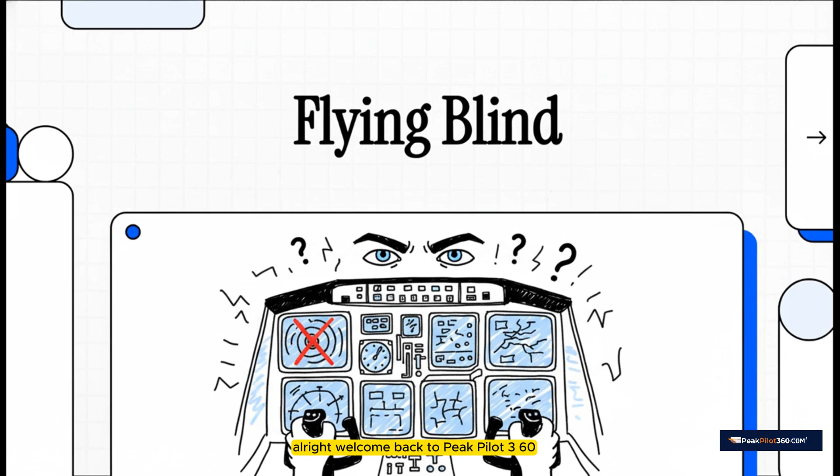Imagine you're in the interview. The captain across the table leans forward and asks, 'You're at flight level 350 and you get an unreliable airspeed warning on the ECAM. What are your immediate memory items?' It's a tough question, and your answer could make or break the interview. Stick with me, and by the end of this explainer, you'll know exactly how to nail it.

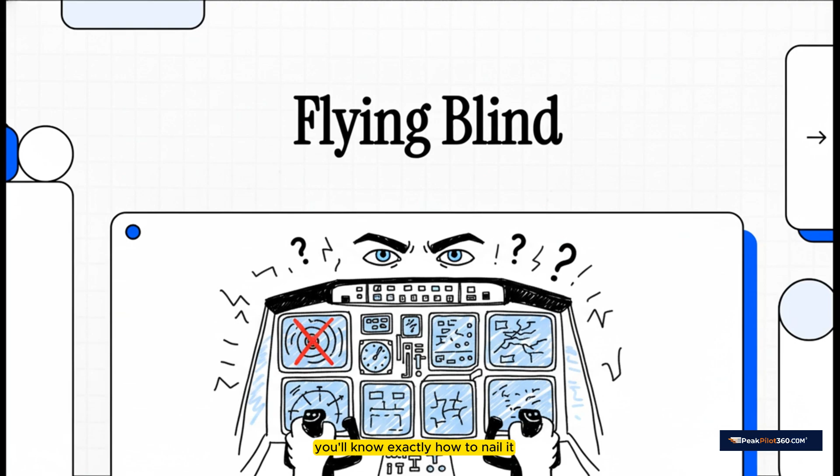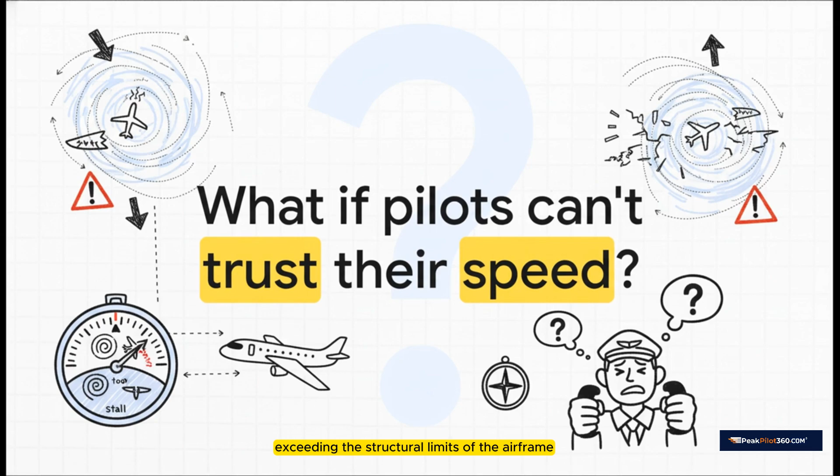So let's break this down. This is the heart of the problem, isn't it? If you fly too slow, you're looking at a stall, you lose lift. If you fly too fast, you risk exceeding the structural limits of the airframe. When that speed tape is telling you lies, you're essentially flying blind between two invisible and very real dangers.

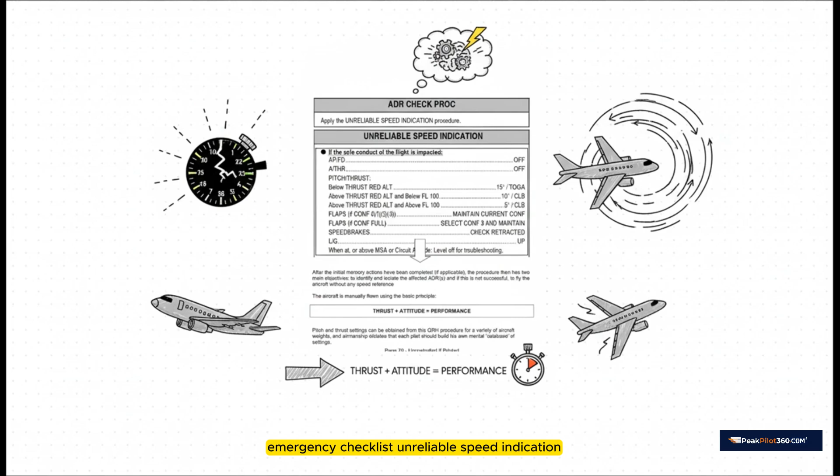So what's the procedure? What do you do? Well, this isn't some made-up scenario for a movie. What you're looking at here is a real-deal emergency checklist. Unreliable speed indication is what we call a memory item. You have to know these actions cold, by heart, because when this happens for real, there is absolutely no time to be fumbling around for the QRH.

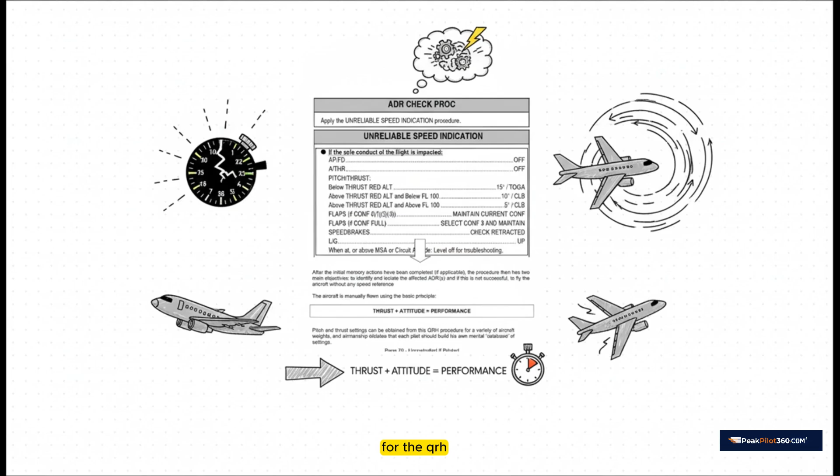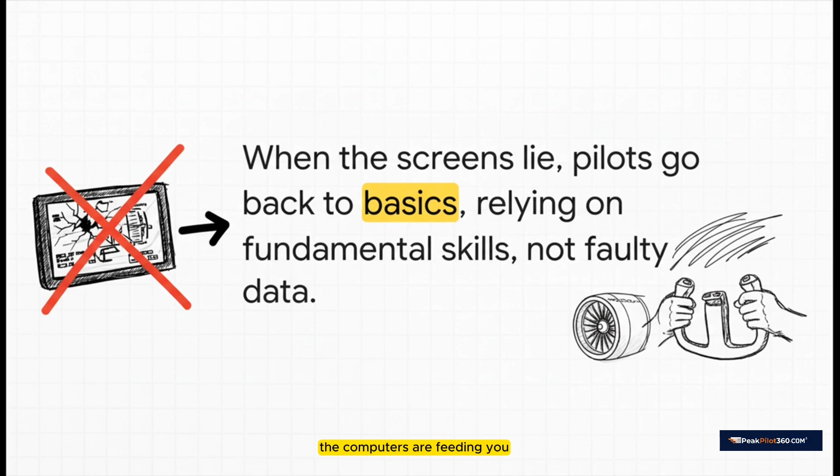The answer isn't some other piece of fancy tech. In fact, it's the opposite. The procedure is to strip everything away. You've got to ignore the bad data the computers are feeding you and get back to the absolute fundamentals, the raw relationship between you, your engines, and the air.

And this, right here, is the core of it all. It's a simple, beautiful formula every single pilot lives by. Thrust is the power you command from the engines. Attitude is the pitch of the aircraft's nose against the horizon. You, the pilot, control those two things. And when you set a known thrust and a known attitude, you get a predictable performance, a predictable speed.

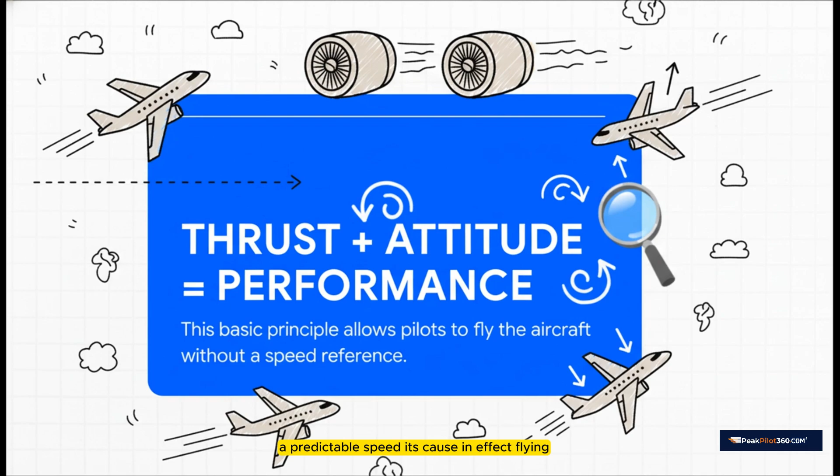It's cause and effect flying, not just reading a screen. So, why does this work? Why can we trust this simple formula when we can't trust a multi-million-dollar avionics suite? Well, it's because it's all grounded in the fundamental physics of flight, the four forces that keep that big machine in the sky. We talk a lot about speed generating lift, but that's really only half the picture.

The real hero here is the angle of attack, the AOA. That's the angle where the wing meets the oncoming air. Now listen, no matter your speed, no matter your weight or altitude, a wing will always stall at the exact same critical angle of attack. So by controlling your attitude, you're actually taking control of that vital angle.

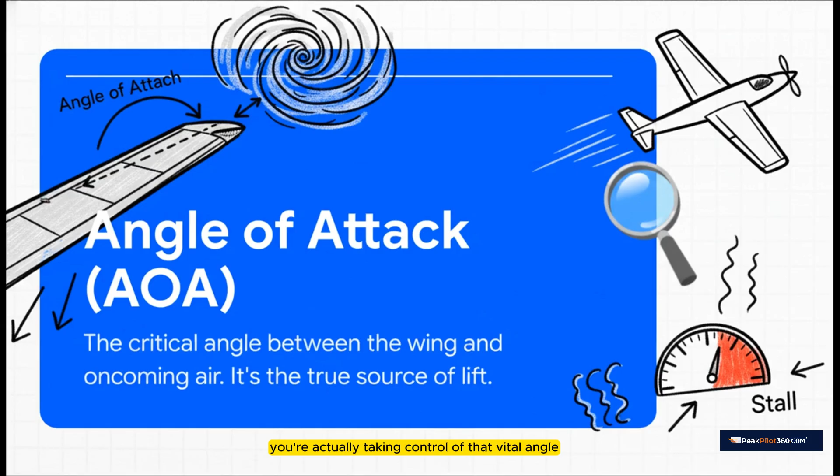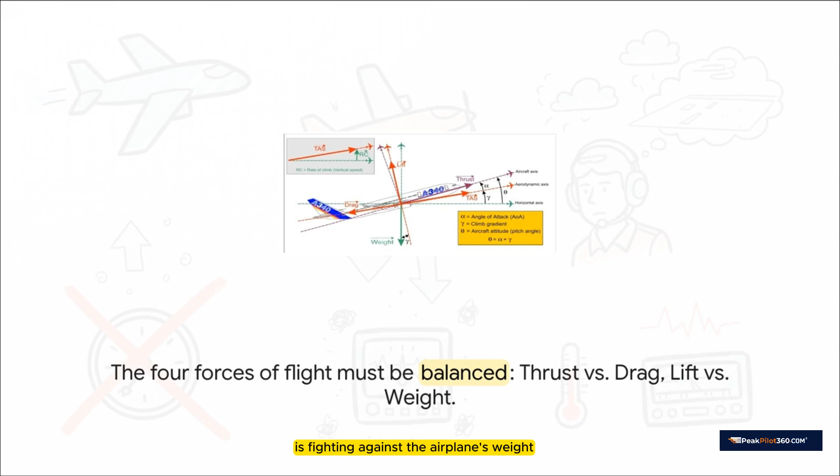And this image shows that constant balancing act we're always in. For an aircraft to fly straight and level, these four forces have got to be in equilibrium. You've got thrust from the engines fighting against drag, and at the same time, lift from the wings is fighting against the airplane's weight. Every input a pilot makes is about managing this balance to climb, descend, or turn.

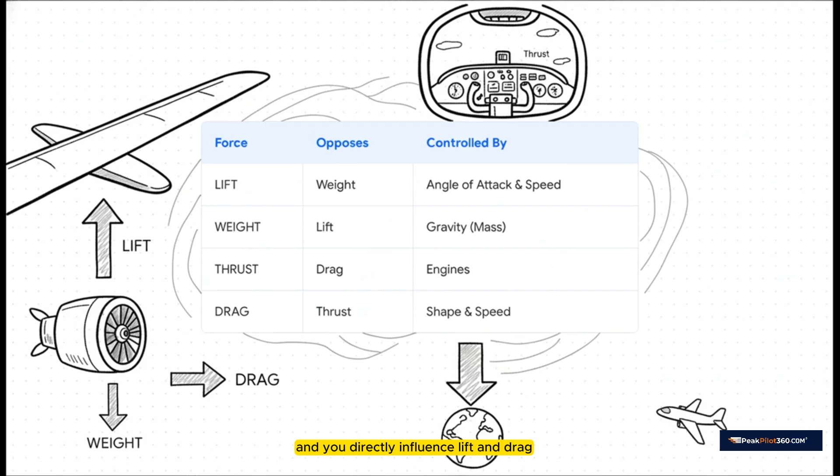This little table makes it even clearer. An interviewer might ask you, which of the four forces do you directly control? And the answer is simple. You directly control thrust with the thrust levers, and you directly influence lift and drag by manipulating the airplane's attitude, which changes your angle of attack. Weight is, well, pretty much fixed for the moment.

So here's the bottom line. Even when your airspeed indicator is shot, you still have the two primary controls you need to safely fly the aircraft. Set the thrust, set the attitude. You're no longer relying on a sensor, you are flying the aircraft based on first principles.

Okay, so the theory makes sense, but how does this actually work in the cockpit, at 30,000 feet with passengers in the back? It comes down to flying by a set of numbers you know you can trust. Here's the drill. First thing, you disconnect the automation. Get the autopilot and autothrust out of the loop because they're being fed bad information.

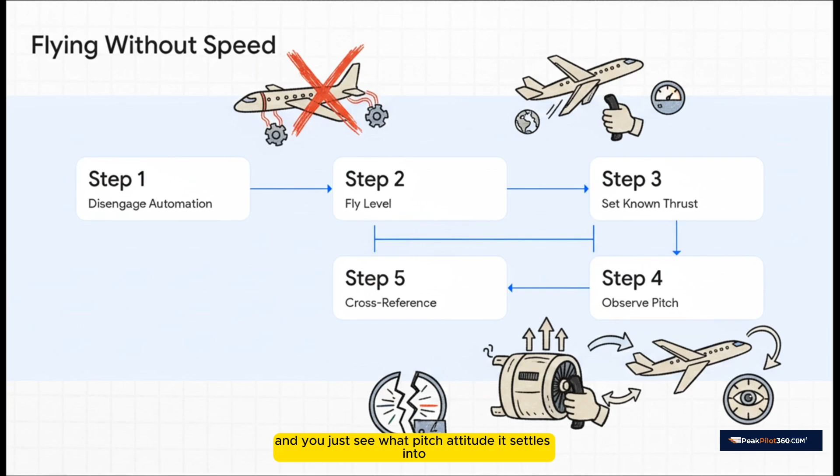You take manual control. Next, you set a known, memorized power setting. You hold the airplane level using your attitude indicator, and you just see what pitch attitude it settles into. That attitude now becomes your new airspeed indicator. It's really intuitive when you think about it.

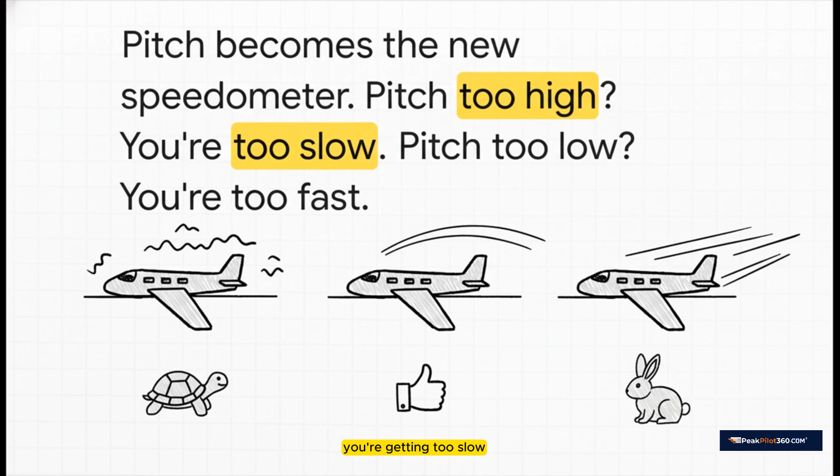For a given amount of power, if you have to keep pulling the nose way up to stay level, what does that tell you? It means the wings are struggling for lift, you're getting too slow. And if you find yourself having to push the nose down to stop from climbing, you've got excess energy, you're too fast. The attitude indicator tells you everything you need to know.

And look, you don't have to guess these numbers. In your quick reference handbook, your QRH, you have tables just like this. So for an Airbus A320, clean configuration at about 60 tons, below flight level 250, the book says to set 60% N1. If you do that, you should get a pitch attitude of about 4 degrees nose up. And if you get that, you can be confident you're flying safely around 225 knots. It's a proven recipe for safe flight.

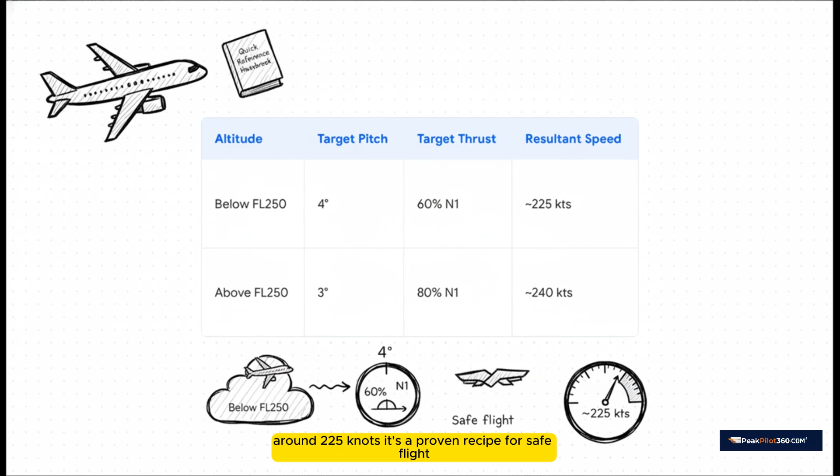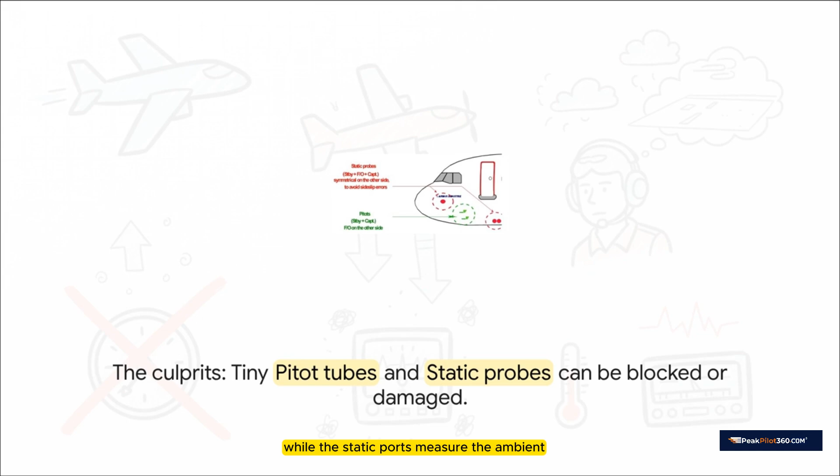So what causes such a critical failure? And more importantly, what does this whole situation teach us about our role as pilots in a world of ever-increasing automation? Believe it or not, our entire airspeed indication system often boils down to these tiny little probes. You can see them here. The pitot tubes face forward into the wind, measuring total pressure, while the static ports measure the ambient air pressure. The computer does some quick math with the difference, and voila, you have airspeed.

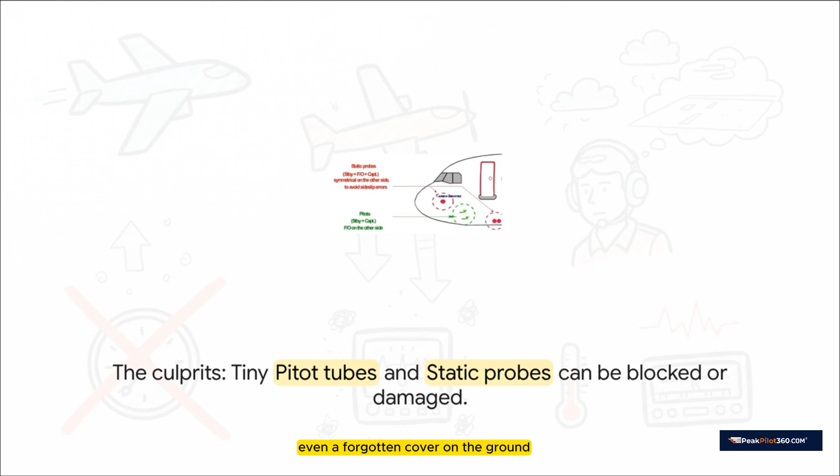But they can get blocked. Ice, insects, even a forgotten cover on the ground can take out the whole system. I love this quote from an Airbus flight manual. It says it all. Good airmanship is more than just knowing emergency procedures. It's about developing a real feel for the airplane. It's about building that mental database of what pitch and thrust settings look and feel right for every phase of flight. That way, when the computers get confused, you don't.

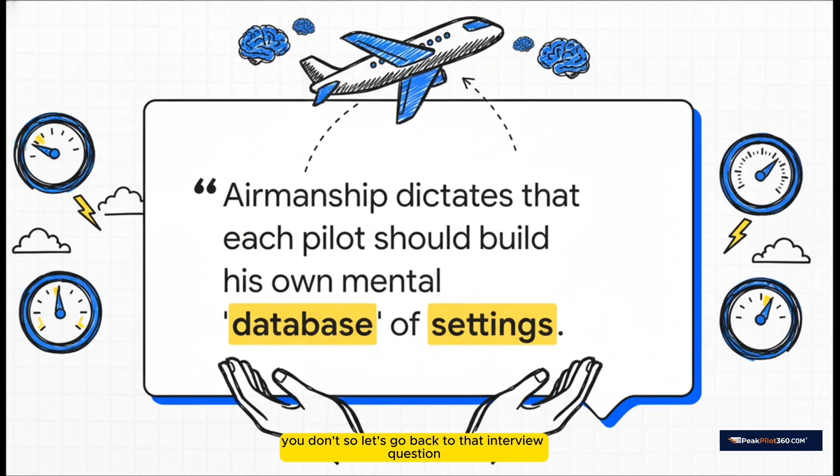So, let's go back to that interview question. What are your immediate memory items for an unreliable airspeed warning? The answer they are looking for is autopilot off, auto thrust off, flight directors off. Then you pitch and thrust for level flight according to the tables. Simple, direct, and it shows you know how to take command when the automation fails.

The ultimate takeaway is that in a modern glass cockpit, the most important safety system is, and always will be, a well-trained, knowledgeable pilot. Study hard, fly safe, go get that job.